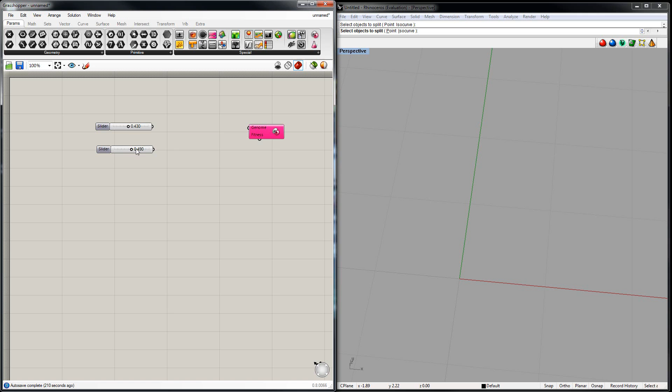The very first thing I should say about Galapagos is that it's an evolutionary solver, which means it tries to get a better solution over time on its own, once you give it two things: a list of genes, which is sliders like this, as many as you want, and a special thing called a fitness function, which tells Galapagos how good one setup of your sliders is compared to another. Galapagos just slightly changes your sliders over time and finds out, using this fitness function, which setup is better, then goes with that.

I won't get into how evolution itself works to produce a better solution, but what I will be telling you is just how to use Galapagos - enough information so you can set it up, run it, and get something happening in your own model. So, the very first thing, create the Galapagos component.

Now what you need to do is define the genome parameter, which is the set of sliders that you connect up to Galapagos. You can have as many sliders as you want - I'll just copy and paste a bunch here to make an example. You can give it as many sliders as you want and click and drag to connect them up.

Now you'll notice it doesn't click and drag from the slider up to genome - it does not want to connect. That's because Galapagos is a special component that you have to click and drag from instead. This red line will come out of genome and then snap onto the corner or side of the parameter, the slider. So you can click and drag manually like this, and then shift click and drag to attach multiple ones. You'll see there's now two arrows coming out when I select Galapagos.

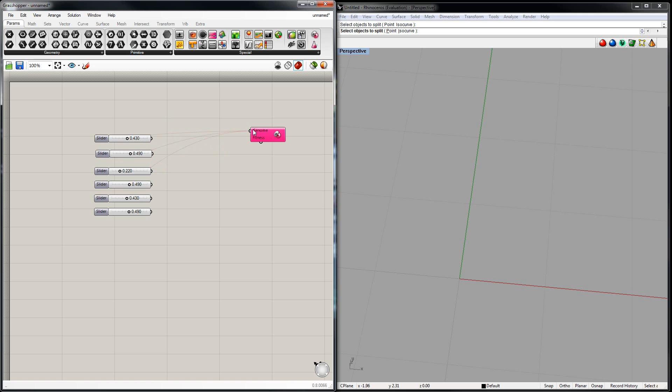But that can be a little bit tedious. You can also, by the way, hold Control and click drag to disconnect it. So now this middle one here has been disconnected. But this can get a little bit tedious.

So they added a few little things to make it faster to add the sliders you want to Galapagos. One option is to right click Genome and click All Sliders, and that will connect all the sliders in your Grasshopper script to Galapagos. Now for a small script, I think that's reasonable enough - that could be what you want, but you guys might end up with reasonably large scripts with maybe, I don't know, 10 or more sliders in it.

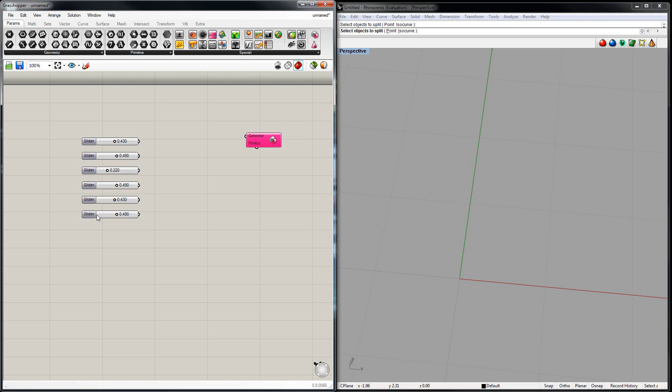So the easiest way for you guys to do it - let me just quickly disconnect all of these, I'll just delete Galapagos and add it again, to effectively delete the links. The way that might be most useful to you is to select multiple sliders by holding Shift and clicking on different sliders, then right click on Genome and click Selected Sliders, and that will connect only the sliders you have selected at that point in time.

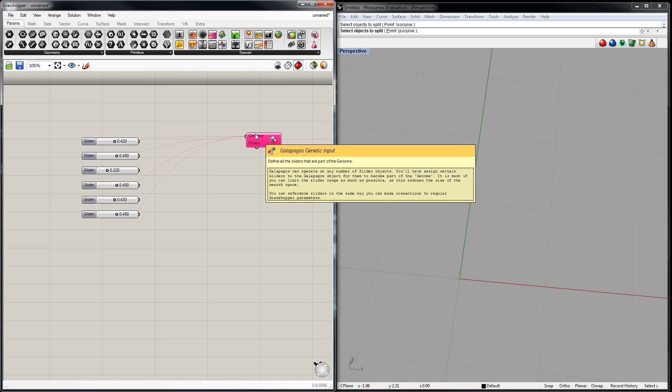So that covers most of what you'll need to know about the genome. The final thing I'll say is that Galapagos tends to work best with fewer sliders connected up to it. Without getting into too much detail, it just gets harder for Galapagos to make a solution better if you have more sliders. So I'd recommend a maximum of maybe 6 or 7 sliders total, really. You don't need to have all that many hooked up, because it does become a little bit harder for Galapagos to find a good solution.

Now, onto this thing I mentioned before called the fitness function, which I'll explain by saying it takes the model that you've produced, analyzes it in some way to get information about it as numbers. That could be things like area, size, length. It could be maybe a number of random points that you've put in. It could be anything that produces a number that you can work with.

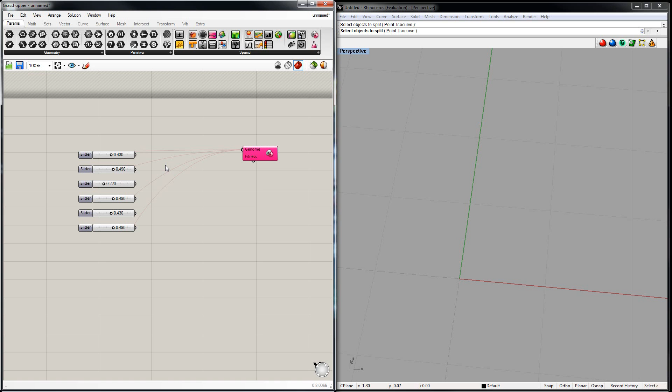And then it takes that, does some mathsy operation on it to figure out what makes your model good compared to another setup of that model. So I've created a couple of little examples here to show this.

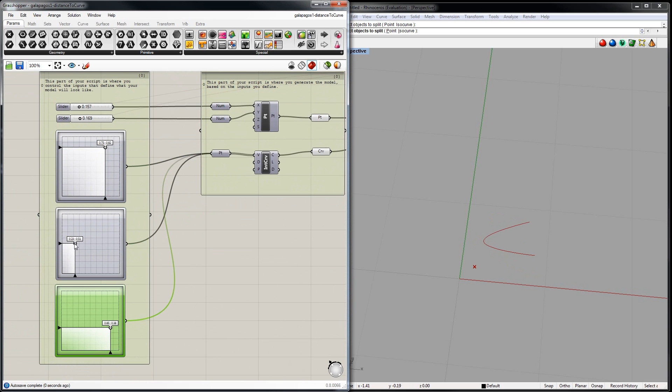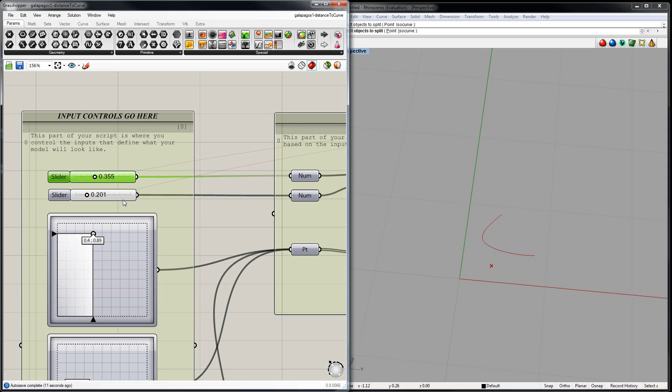This one takes a curve, a simple curve defined by 3 points you can see in the right hand panel. You can move that curve around, and then it has a point defined by 2 sliders. I would have defined this point using an MD slider, but Galapagos doesn't currently hook up to MD sliders as a genome, so you have to individually make these 2 points. These two numbers become a point over here, which is a bit inconvenient, but there you go.

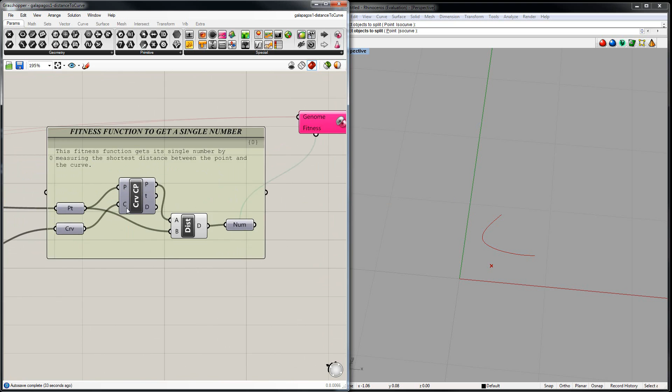So what this script does is it first creates this curve, creates this point that you can move around, and then with this fitness function I tell Galapagos to make this point move as close as possible to this curve. So this point can end up almost anywhere on this curve, as long as it's as close to it as possible. Now the way I do that is I take the point and the curve out of this model that I've generated here.

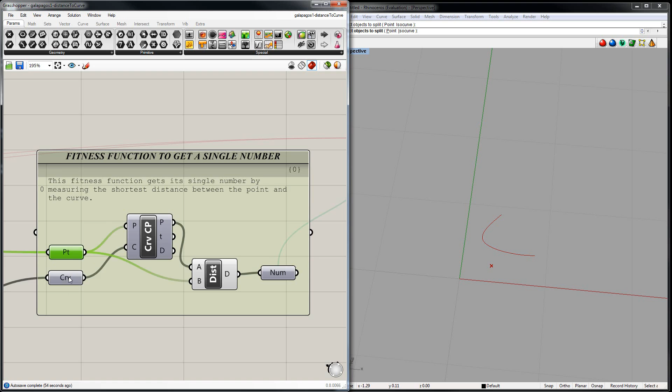This is all the visuals, by the way, which should be going on in here. No visuals, nothing generated in your model should ever be happening in your fitness function. You should only take what you've been generating in this section of your script, processing it in the fitness function to get some number.

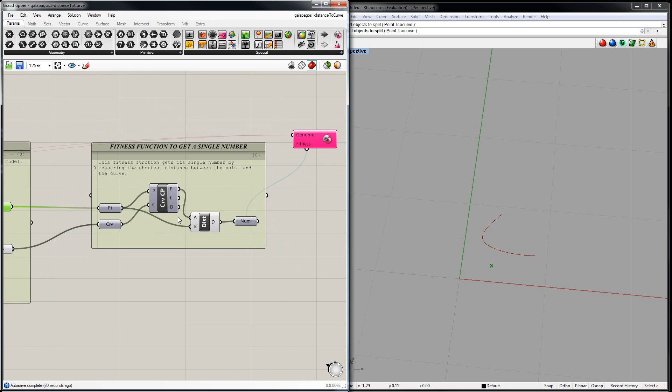So I take the point here and the curve, and I use this little component here that measures the distance between the point and the curve. And then here I measure the total distance between this point and this curve to get a number.

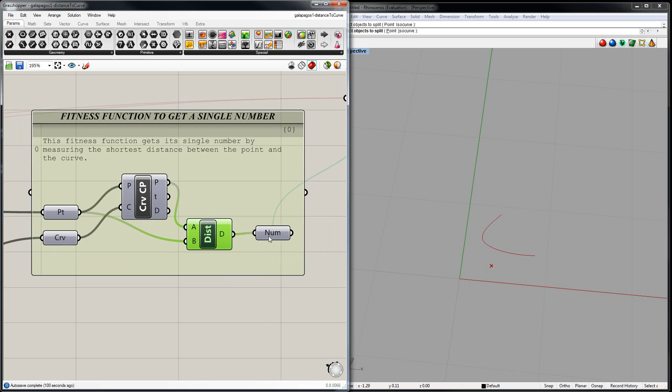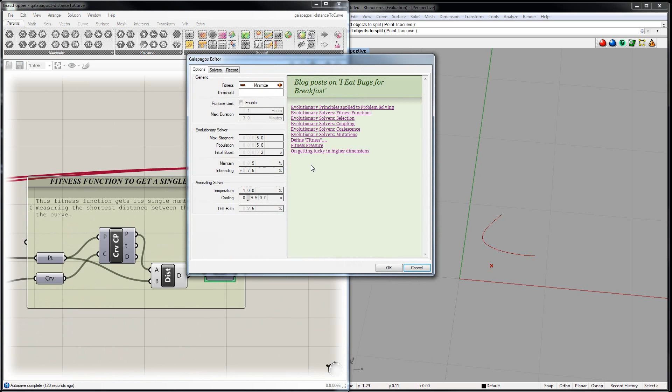So I'll give you a quick example of how this script will end up running. I'll show you that I've connected up the genome - I've already connected it to these 2 sliders here. So when I double click the Galapagos component, a little window will appear, and I'll right click and drag to move back over to the sliders so you can see them changing over time.

And what we'll do is, okay, this fitness number, the number that we passed in over here, connected up - you connect it by clicking and dragging from fitness to the number. Again, like the genome, you can't click and drag from number up there, it just won't connect. So the one value you'll really want to pay attention to is the fitness, which you'll want to either maximize, increase over time, or minimize and decrease it over time. So this number that you pass in is the fitness.

Galapagos will try to increase or decrease it depending which of these 2 options you click to select. At the moment we're measuring distance and we want it to get closer, so we want it to get smaller over time, so we're minimizing it.

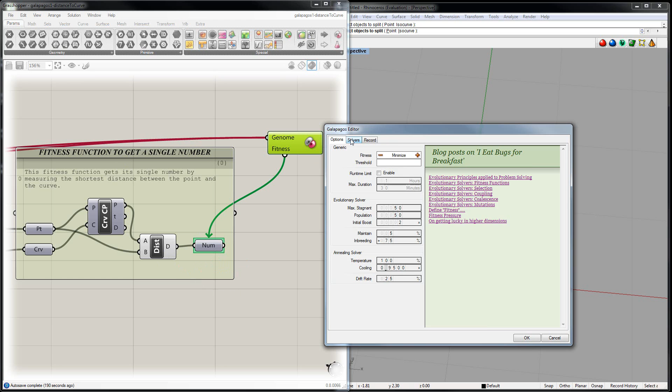So now click on the Solvers tab, and I'll move back over to show the sliders, and I'll click Start Solver. And what it'll do is by default, it'll only show the best solution it's found in the viewport.

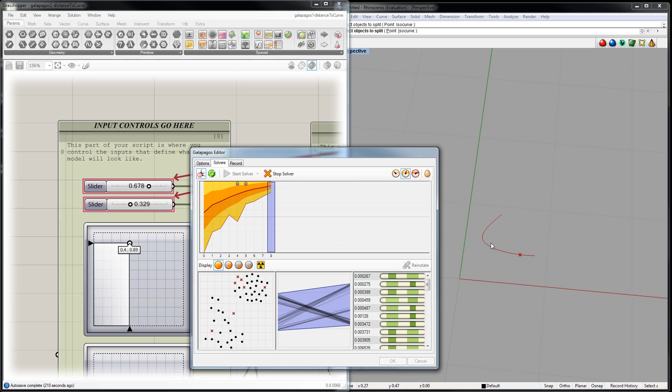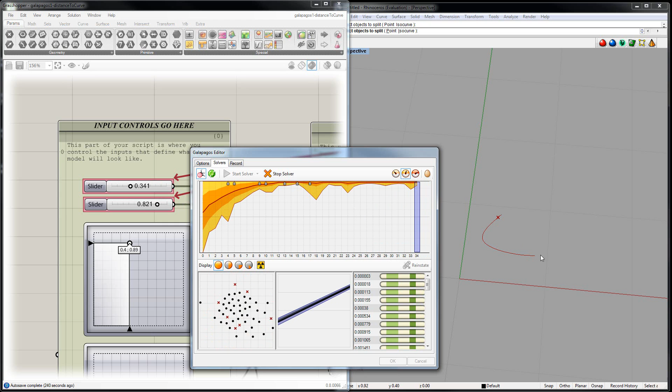As you can see here, these sliders are going crazy. It's actually running through, for each of these numbers you see appearing here, 50 different setups of these sliders, 50 for each of these numbers. So these are going very fast, and you're only seeing the very best solution in the viewport. If you want to see all the solutions it's trying, you click this option here, Display All Genomes in the Rhino viewport.

Now this will make your script run a little bit slower. The Galapagos component will be a little bit slower because this visualization actually takes a little bit of time to show.

So ideally you'll just be showing the best option so far in the Rhino viewport. Now this looks like it's gotten a pretty good solution, so I'll just click Stop Solver. Oh, it stopped it for me already, so that's good.

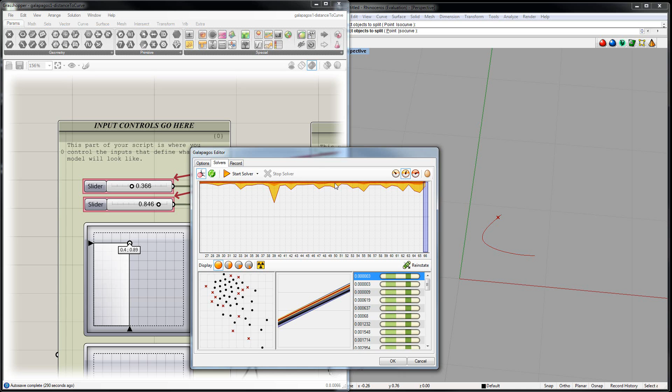And what I'll show you as well is this little list here is a list of genomes in order of the fitness number they were all given. So this is the current, this is what's called the 66th generation, the 66th attempt at trying to get a very good solution. And there are, I think, 50 options or something like that. I'm not going to count them, that'll take a little too long.

So it's ordered from what Galapagos thinks is the best solution according to your fitness function, to the current generation's worst solution.

Now what you can do is click on these individually and click Reinstate, and that will change these sliders to whatever that particular genome's slider setup was, letting you see what it had for that option.

So if you run Galapagos and get a terrible looking model as the final result, you can look through this list and decide maybe this one's better, or that one's better. You can go with a suboptimal model that just looks better to you. This is where it becomes a designer's tool, where you can select yourself what the better option is.

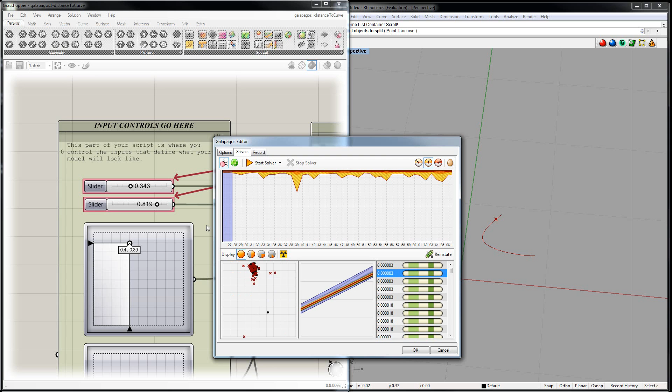So let's go back a while to number 27, and we'll pick one down near the bottom to see how much it changes. Select that, click Reinstate - okay, very small change. What about this one? Pretty much the same. So depending how complex your model is, you can end up with very vastly different options here.

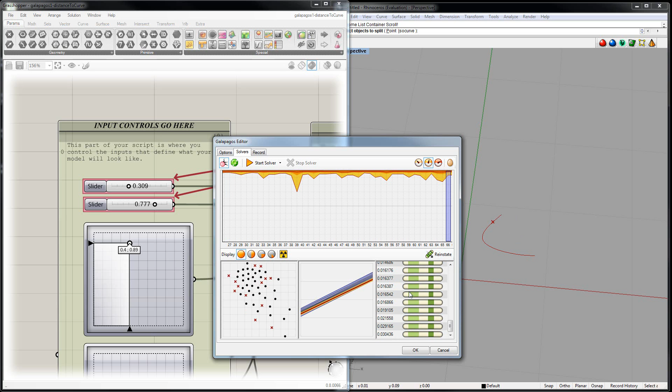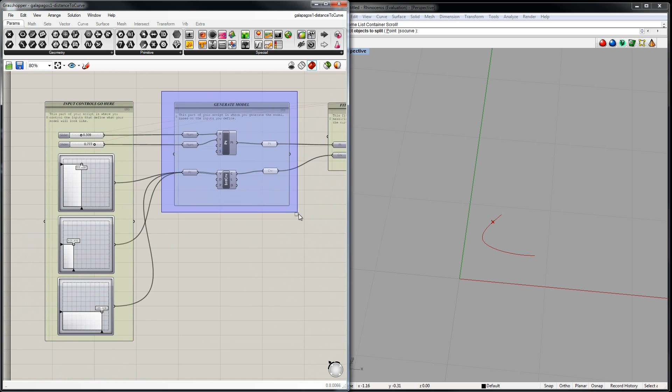This example here is pretty straightforward. What I've done is follow a general layout of how you'd make your Grasshopper script: all your inputs ideally on the very far left, then all your model generation happening here, and then the moment you add a Galapagos component, you end up with another step - an analysis after you generate your model, which produces your one number.

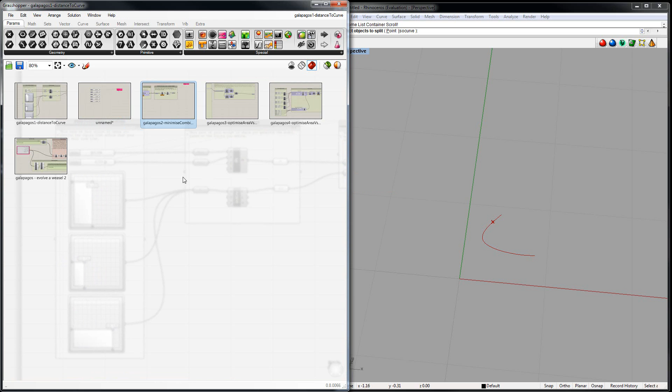Now I've got another example here that gets a little bit more complex. Let's see, I think this one is it. There we go. So what this one does, first of all, it uses a lot of genes. Let me select the Galapagos component to highlight what it's connected to. Note as well that I've got the same layout: input, generation, and then analysis.

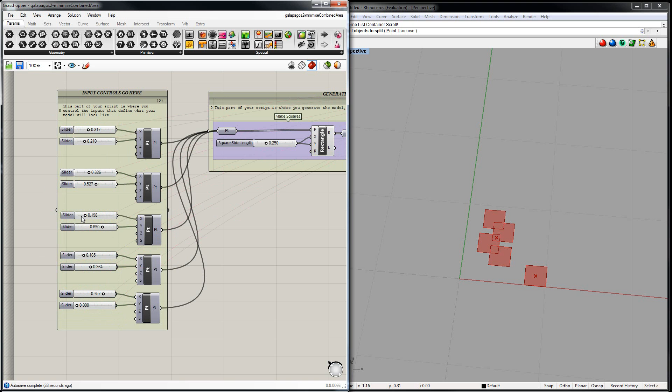So I've hooked it up to a ton of sliders here. Remember what I said, I like to limit it to something like 6 or 7 sliders, otherwise it has a bit of trouble. So we know this will take a while to find a good solution. It won't fail to find one necessarily, it'll just take a while - much longer than if we just deleted or even removed one of these points. It would go much faster.

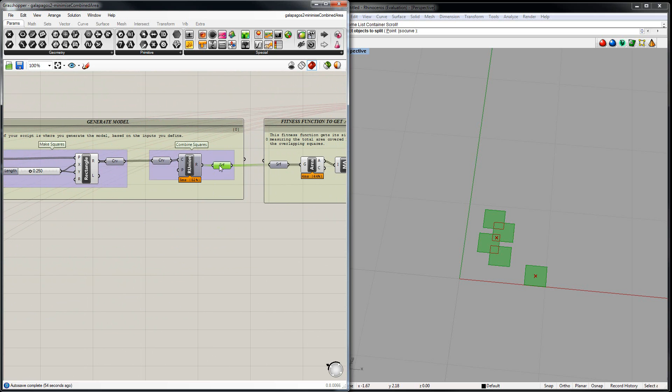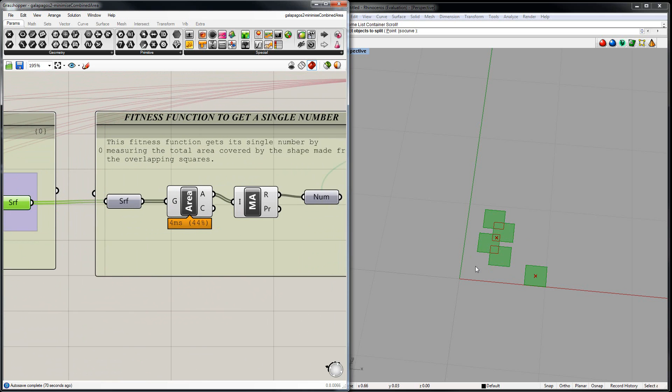What I've got it doing here is generating one or as few surfaces as possible. Given a bunch of rectangles here, it combines them together and then finds out the total area that they cover. What I've got this fitness function doing is taking that final surface, measuring the area of it, adding that all together to get one number, and using that as the fitness function.

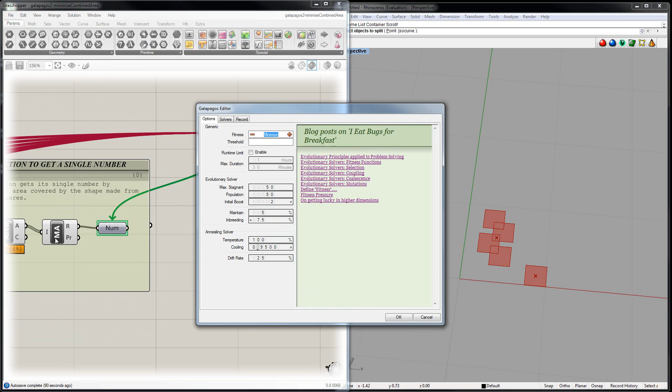So what happens now, if we double click here, we'll go to solvers. Now we've got it minimizing this, so it's minimizing the area - it's trying to reduce the total area.

So if we click Start Solver, and I'll move over here and show you the sliders going crazy, you'll notice these squares start to jostle and get closer and closer together. Now, to us, the obvious best solution is when all the squares are in exactly the same spot, and that will make the total area as small as possible, because it won't be 2 squares or whatever - it'll just be 1. So we'll let it run a little bit, and we'll see it's approaching a reasonably good solution here.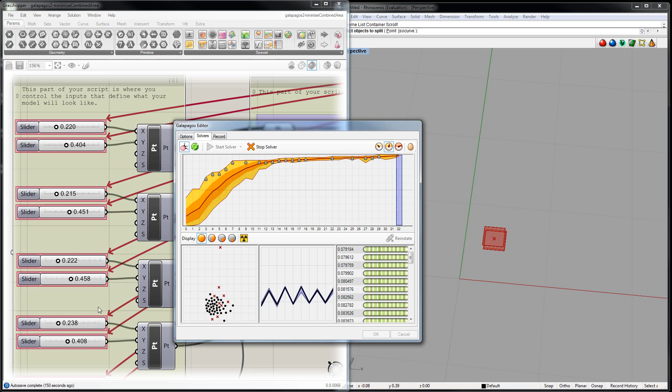Now what you'll see as well is, like I said, it's having a little bit of trouble getting the best possible solution here. It's somewhat stuck, because what happens is when it tries to change one slider, it actually ends up trying to change most of them in one hit, and a lot of the time that ends up not working well. You end up with 10 good sliders being changed to make a small improvement in one bad slider. So a lot of the time it just doesn't want to make that change to fix the final part.

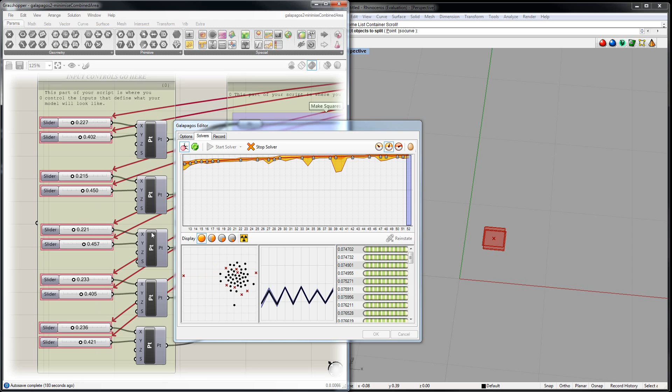So here we go, very close to a solution, and as you can see, it's getting up to a very large number of generations here. You'll usually find that you'll run up to maybe generation 100 and get the kind of solution you're looking for. So you can just sit here and let it do its own thing, or if you get a little bit bored, or you find it's already at a good solution, you can click Stop Solver, just up there.

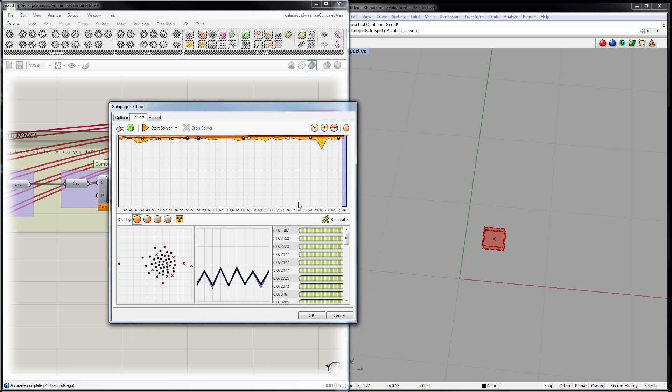Now, so this is just another little demo of how Galapagos can work.

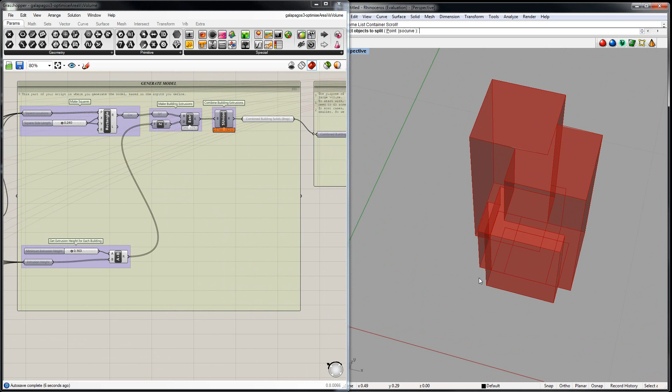Now, the next thing I wanted to show you was a slightly more complex example of a model generated. I'm still using that base idea of having these squares all added together, but now I'm adding a little bit more complexity to the model.

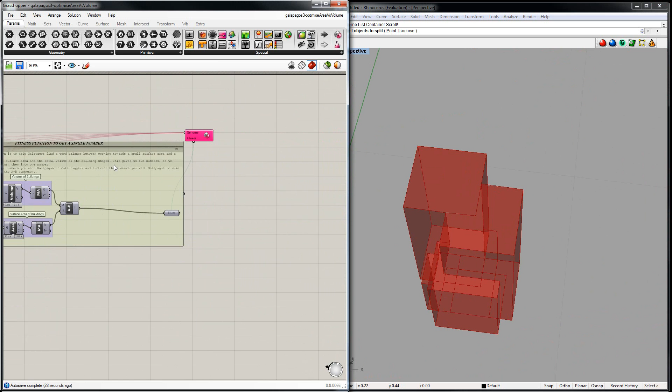I'm now pulling each of these squares up, extruding them upwards to different heights that I think I've got Galapagos controlling. Yes, I do. I'll just select Galapagos so you can see what it's controlling. So these are the individual heights, you can see going up and down there. And you can think of this - very quickly this starts looking somewhat like a building form. So you can end up with some fairly simple models that you can nonetheless let Galapagos get its hooks into.

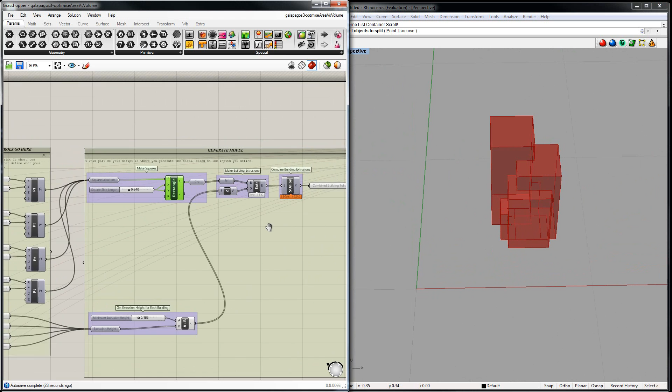So all I've done here is I've taken these rectangles and extruded them and combined them into one solid using this solid union. Or it could be more than one solid, if they're not touching, but that's a thing for Grasshopper to figure out. So now what I've done here is something a little bit more interesting than the fitness functions from before.

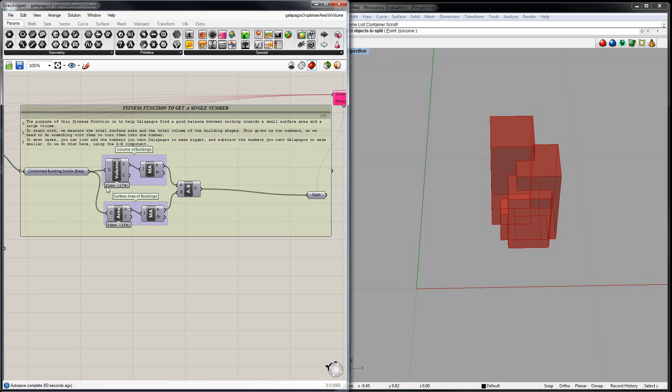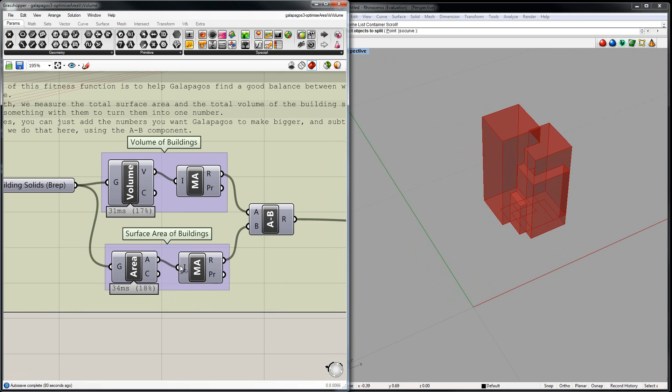Where a fitness function, where Galapagos starts actually getting useful and interesting, is when you have two competing criteria battling against one another for precedence in the model. So in this case, what I've got is I've measured the total volume of the model against the total surface area of the model. What I'm trying to do here with this bit of maths is say I want a bigger volume, but I want a smaller surface area. So hopefully it's fairly straightforward to realize that usually when you end up with a bigger volume, you'll also get a bigger surface area. So in that sense, these two criteria are automatically conflicting.

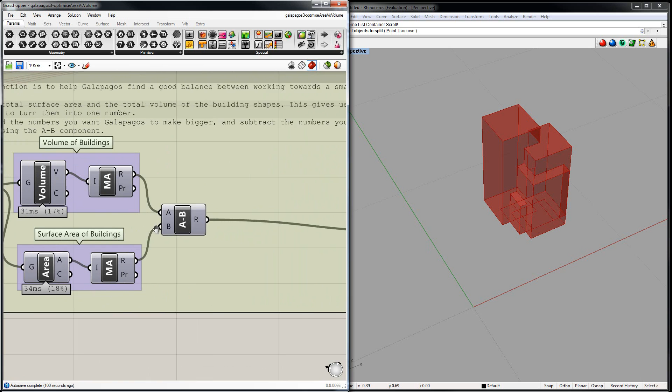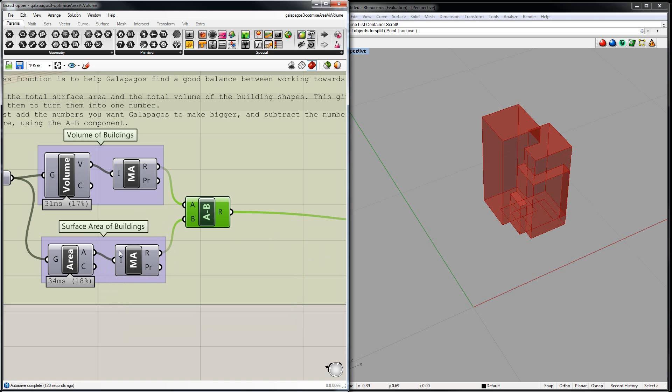So, the way I made them conflict like that is I've brought them together here - normally if you want them both to be bigger, you'd say A plus B. But because I want B, this bit, to be smaller, I've said A minus B. So we're subtracting the one we want to get smaller. That's a thing you can do generally with your analysis - if you want a thing to get smaller, you subtract it, and if you want it to get bigger, you add it. That can be a handy little thing to do at times.

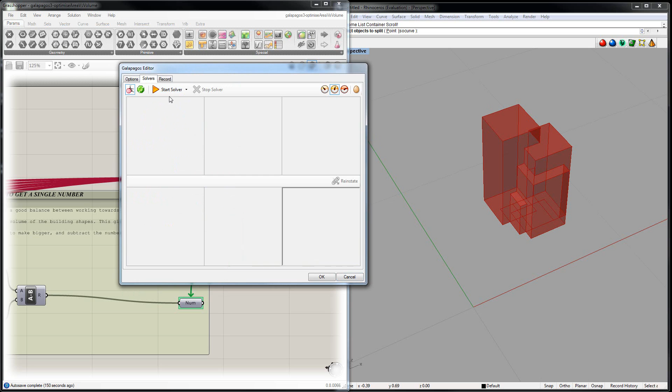So I'll run this now and we'll see what it does. First of all, we want to make sure - I think this is what we want - maximizing. We'll see what happens, and we'll click Start Solver. Now this will run a little bit slower compared to before.

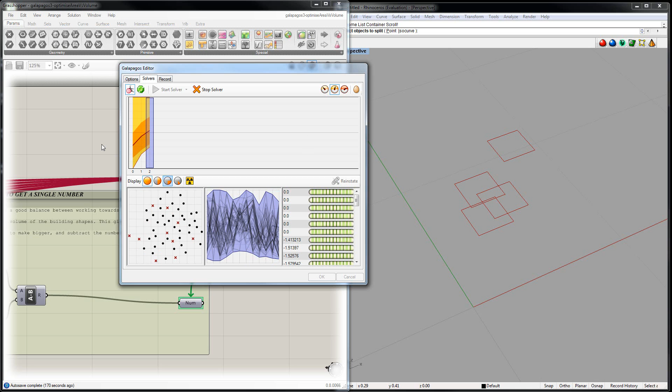So right off the bat it's shown what I wanted to show. I guess I can stop the solver fairly quickly. I'll let it run through a few generations and then I'll show you what I was talking about. Alright, I'll stop the solver - so here you'll see that it's hit 0 a few times.

And if I click reinstate, there's actually no model being generated, it seems. It's only got the rectangles, but where's the height? Where are the building shapes and the volumes, right? There's no surface area, there's no volume for it to be using that we can see.

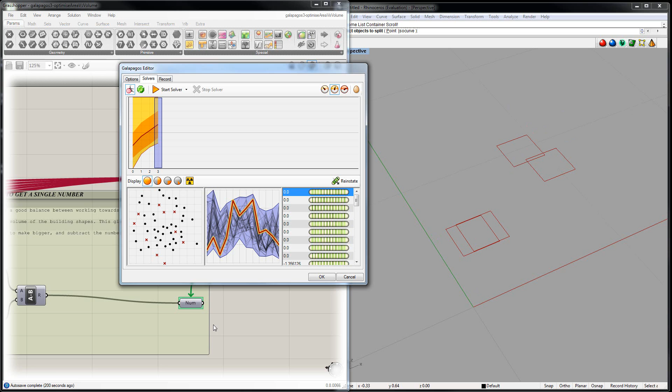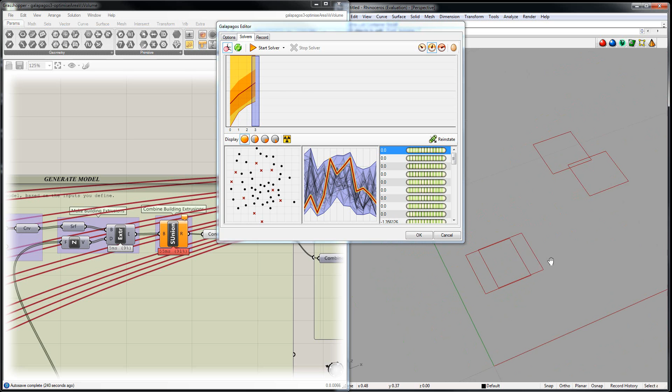Now the reason for this is that Galapagos is surprisingly good at figuring out configurations of these sliders that make Grasshopper's components just not work properly. So what's happened here is we've ended up with intersections - it's tried to join together solids that are just oddly too close to each other. So here you can see, these are almost touching, and these are somewhat close, and it's just having a bit of trouble figuring out if they're touching or not. As a result, we end up with a 0 volume as well as a 0 area, which automatically makes this the best solution, because we end up with negative numbers for working solutions.

We'll click reinstate. You see here we end up with a negative number, and we're trying to get as big a number as possible.

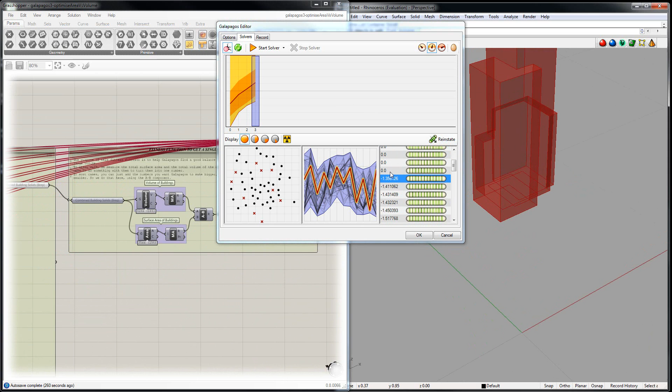So the moment it gets to 0, that's the best it can do. So a glitch wins compared to a non-glitched version. So this is when it becomes important to be the designer and pick the best solution that you think is available.

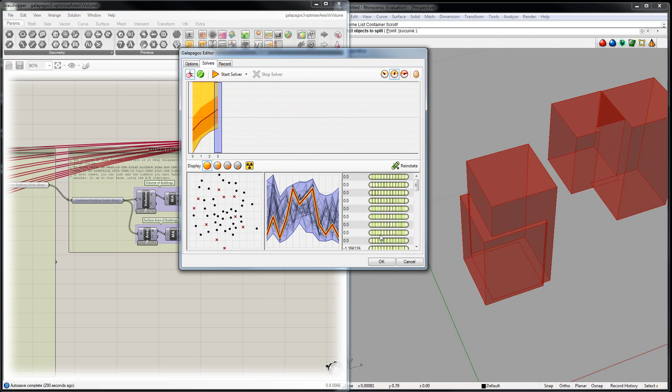Now, for anyone who's interested in automatically fixing and weeding out this kind of thing, I've actually made another model that adds another little part to this fitness function here. And no, you don't have to do this sort of thing, but I'm just adding this in case anyone's interested or wants to know how you would automatically remove this kind of problem in your model once you know it's there. So we'll go to the next one.

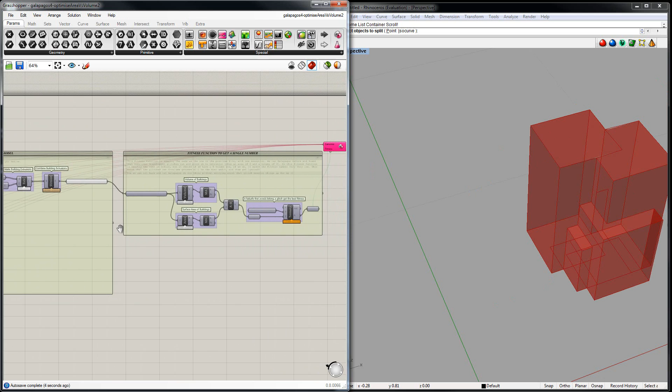And here it's exactly the same model with one tiny change, this part here: a failsafe that avoids letting a glitch get the best fitness. So the way I've decided to handle this, I won't show you exactly what this does, but I'll just tell you what it does. The moment it gets a 0 number coming out of here, I know that there's a problem, that the model has glitched out, because we know that there should be some surface area and some volume for the building.

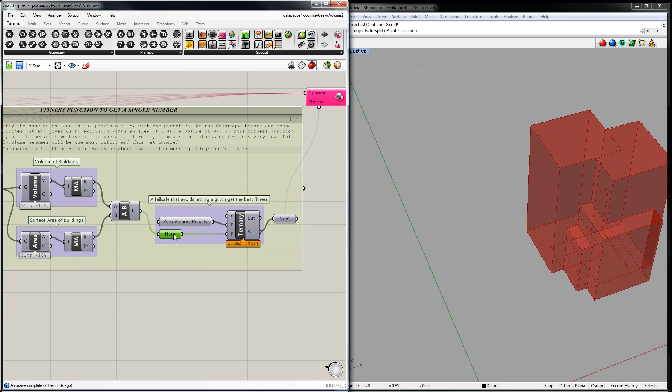So I've made this little function here myself that checks if this number is 0. If it's 0, then it says make the fitness this other number, which is actually minus 1000 or something like that. Very, very small number. So that means that any glitches that result in a 0 coming out of here are automatically kicked to the bottom of the fitness list because their number is so small.

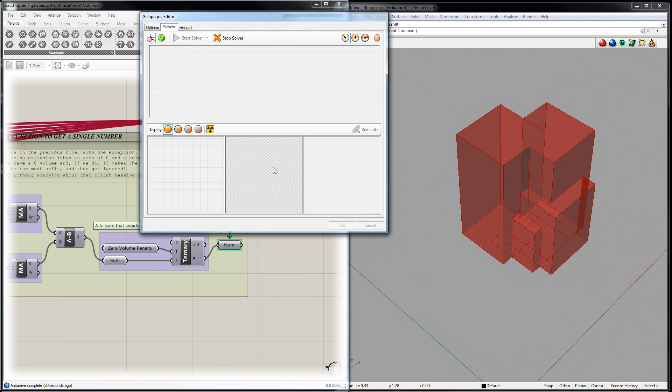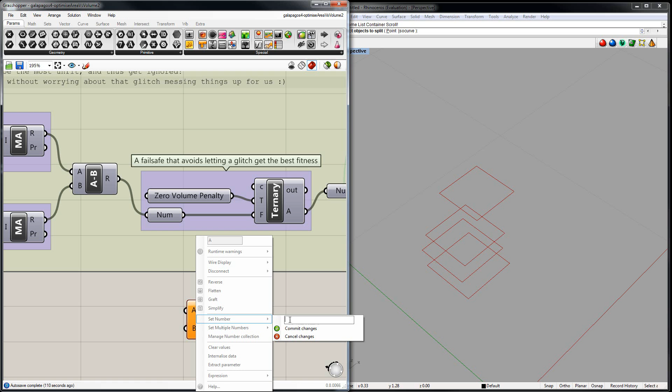So if we run this again, we should hopefully not see any glitches turn up as the best option in the Rhino viewport. So we'll let the solver do its thing. Oops, hang on, I think I've forgotten one important part here. Yes, I have. Sorry about that, guys. I need to test if it's equal to 0. So if this equals 0, then we will put out minus 1000 as the result. Okay, so let me run that again and it'll work now.

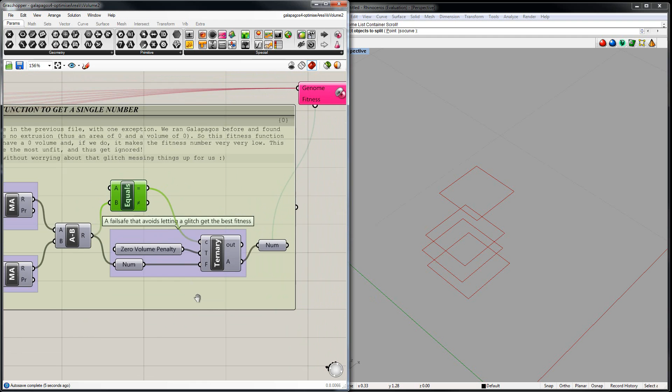So we're still trying to maximize and start the solver, and now we're seeing no zeros turn up as the best possible result. So I'll let that run for a few generations, and that should be a good enough example for that. So you'll notice as well that now that the model's gotten a little bit more complex, and that we've got a slightly more complex fitness function, it is actually taking a little longer to get through every generation. So that's one thing to keep in mind.

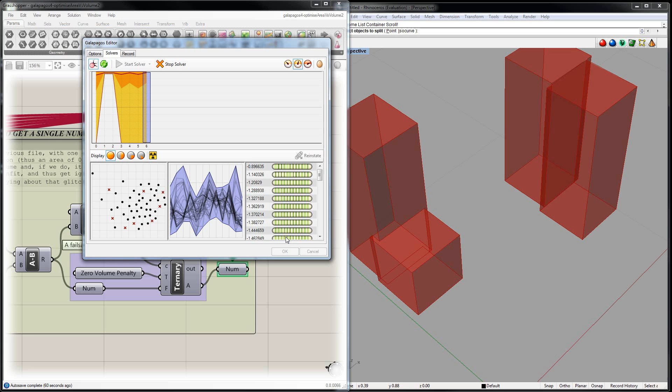If your model is a very slow to process model, one generation, which is 50 different slider setups, will take a very long time to get through. So a good way to test if it's going to take a while is just change one of the sliders in your model and then see how long it takes for Grasshopper to figure out the change and then show it in the viewport. And as long as that takes, multiply that by 50, and that's how long one generation will probably take. So for a lot of people with very, very complex models, you might just want to hit start solver and then walk off for about half an hour and come back and see about 10 or 15 generations that have passed.

Hopefully it's going to find a good solution soon. I think we'll just stop it at 15 because it's taking a little too long to get there. So we'll let it get to 14. And it's showing no signs of finding a better solution than the one that it's currently got. So remember, we are trying to get more volume and less surface area. Okay, I'll click Stop Solver now.

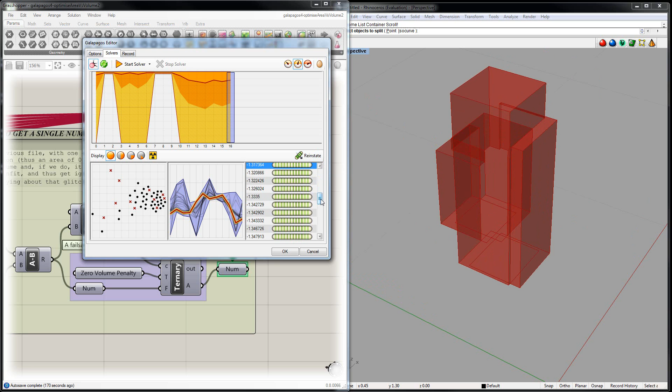So now we can jump through our different configurations, and you'll see, like I said, it ends up with some vastly different solutions when you end up with a very complex model. But what you'll find is, if you let the solver run long enough, say up to about 100 generations, you'll probably end up with one or two kinds of solutions. So maybe it would end up with one little bunched up thing like this, and then the other one would be more spread out and squashed down like this.

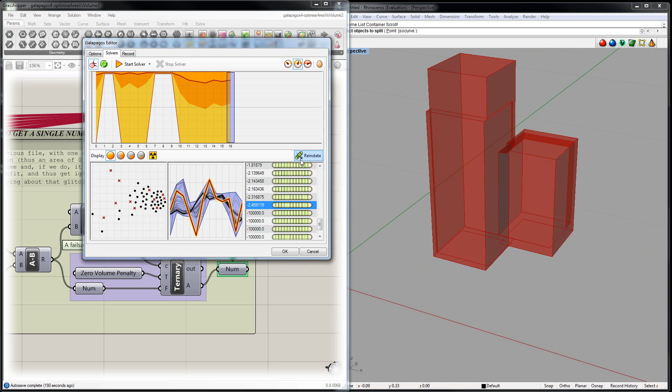Let's see if there's any other nice configurations. So this is exactly what you'd be doing to click through it all. And then, like I said, here are all of our invalid results right down the bottom because we made it a very, very small number. Because, by the way, if we were trying to minimize, we would make sure that these are getting a very large number, just so that they don't end up being the solution that Galapagos thinks it's looking for.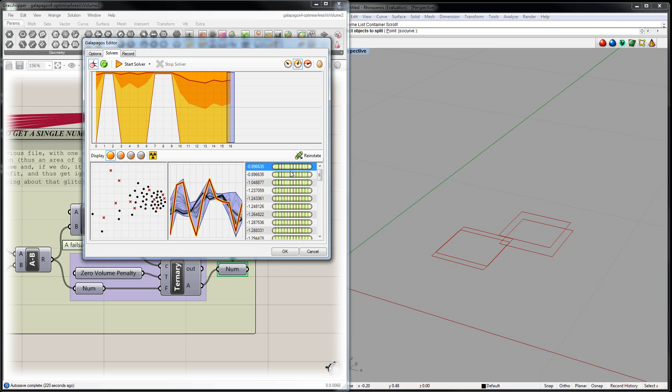Now I've got one more final example to show you guys, largely to just show the variety of things that you can come up with. So here, let me first of all explain what this component is here. It's a little thing that the Grasshopper team have actually only recently added, and it goes hand in hand with Galapagos.

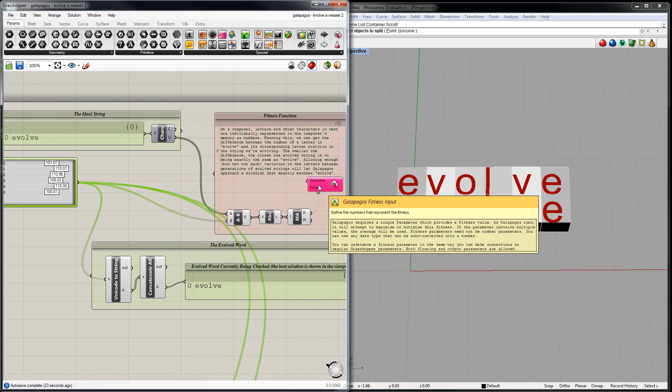What it is, essentially, is a collection of sliders, and they effectively work as like a group of sliders together, and you can do things like right click, edit, change the number of genes in it, so you can go up to 8 or 58 or whatever. Click OK, and then it adds that many more sliders. Let me put it back down to 6.

And yeah, it can be kind of handy, but really I think you guys would be most interested in using normal sliders, because this kind of thing won't let you easily vary the width and the height of things separately. You'll have to do something like access a list and grab the first element of this list and then the second element for the width, and it gets a little bit too fussy when you could just be using sliders. So I've just largely made this as a demo of the kinds of things that Galapagos can do.

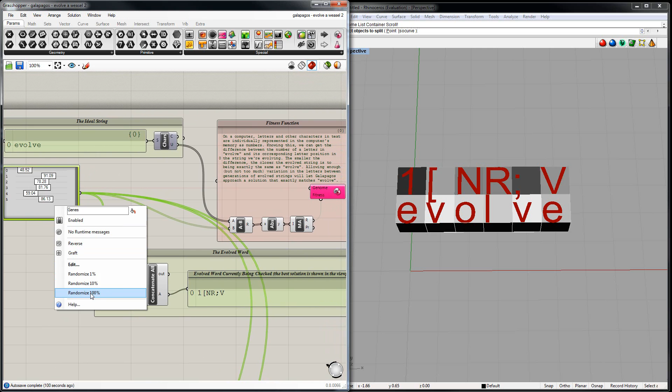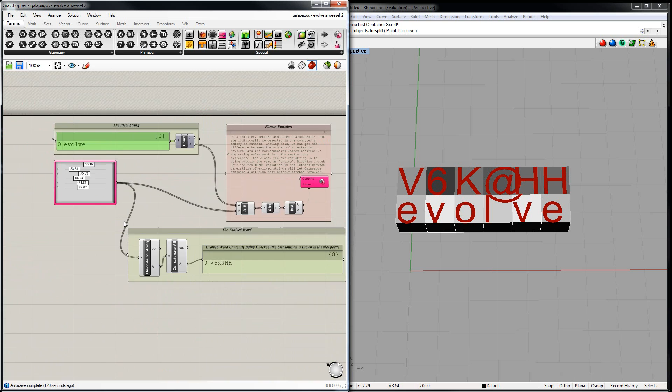So what I'll do here is I'll right click and go randomize 100%, and that just totally changes all of these values. And I guess the next thing I should do is quickly explain what this example is doing. I'm taking this string evolve, and I am trying to make these sliders here produce another string, because the way computers represent strings and letters and stuff is actually with numbers. So I just convert those numbers into a string. So you can see I'm varying the first letter and then the second letter, third, fourth, fifth and sixth.

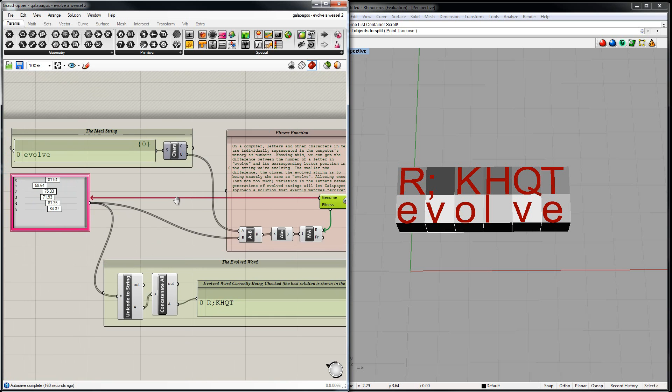So what I'm doing is I'm letting Galapagos control these numbers here and slightly change them over time until this random jumble of letters here becomes the word evolve. So I'll just show you that as a final thing. So we want to minimize fitness because I'm measuring the total distance, just how wrong this is. The more wrong this string is, so the further away this letter is from this one, and so forth all the way down, the bigger the number is. So we want to minimize that number.

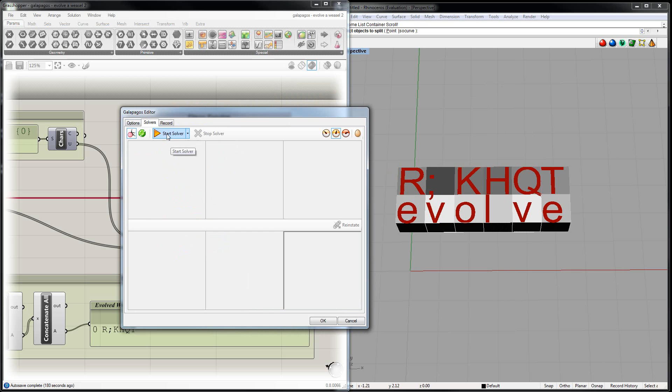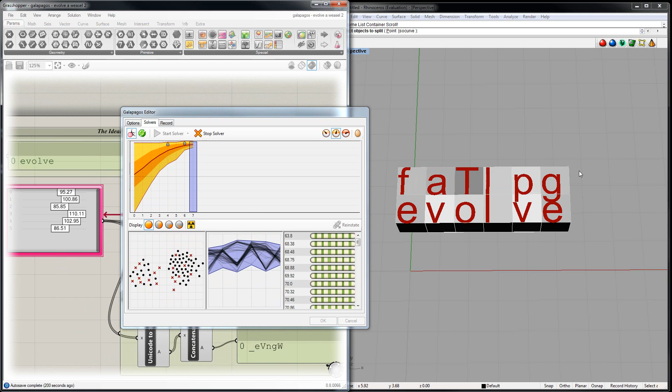Now I'll click Start Solver. And we'll see here that, again, the genes are jumping around. And we've got all of the possibilities that Galapagos is trying showing up here in this text panel. And the best option is showing up here. So I'll stay quiet for a little bit and let it run its course, and you'll see that it will eventually work closer and closer to have the same solution.

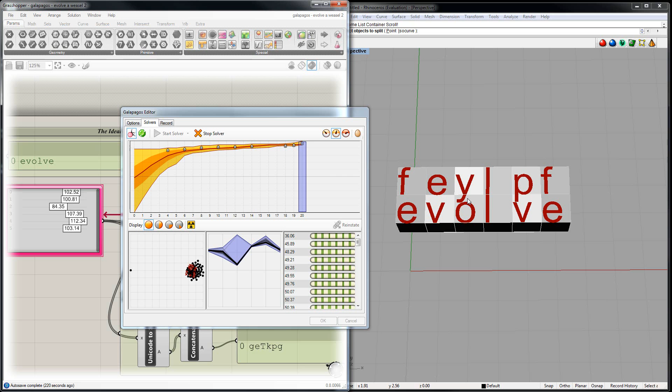And by the way, I also set it up so that the two boxes, the one down bottom and up the top, both have colors showing you just how similar these two solutions are. So if you've got a white here and a black there, then they're very, very different. Whereas if it's two similar grays, then they're very close. So I'll just let it run its course here.

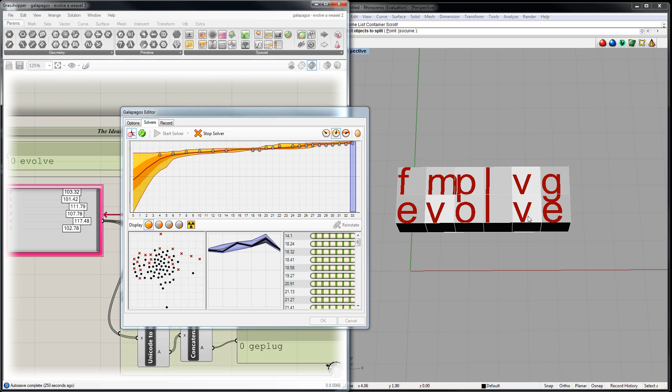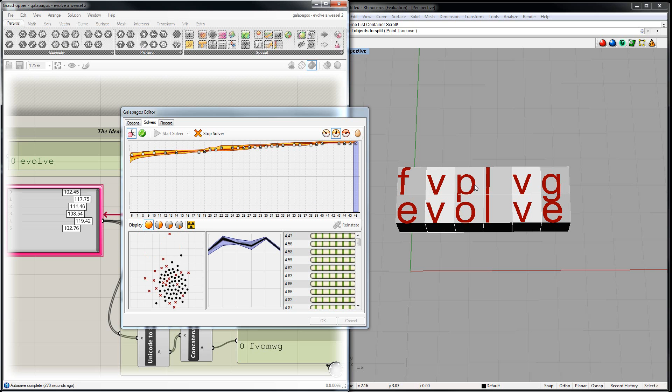And you'll notice as well that it sometimes ends up with a V there and an L there, but then it jumps away. That's kind of how Galapagos works. It changes one value, but then it also tries to change all the others at the same time, just by a tiny, tiny amount. So if it ends up finding a better solution where all of these letters, like maybe 3 letters, are much closer to the ones that they want to match, even though this one was right to begin with, it'll jump away, as long as the penalty for that isn't bigger than the reward for getting 3 right.

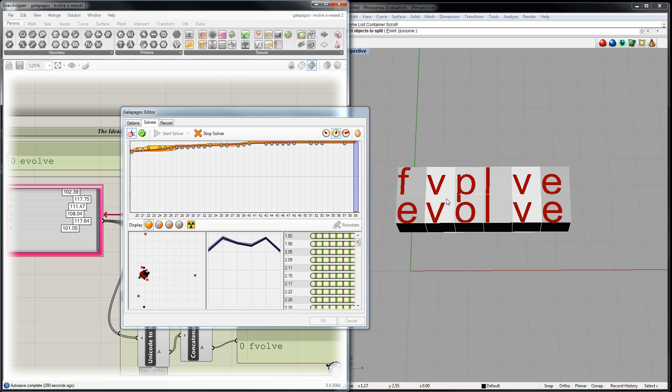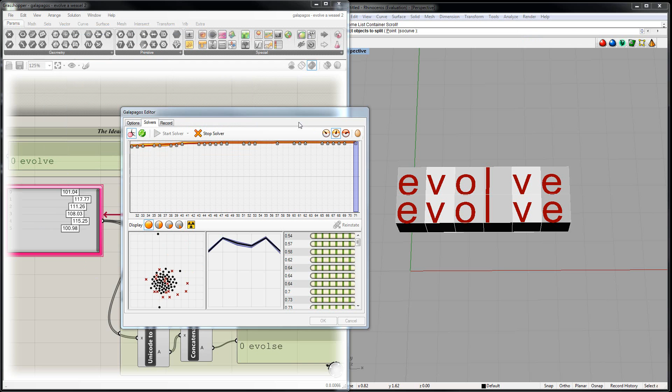So we're sitting on V, L, V, E is correct. Oh, and there we go. All jumped together and correct. Alright, so I guess that's the video, and hopefully we'll be able to get a lot of cool stuff happening in Galapagos in these classes.